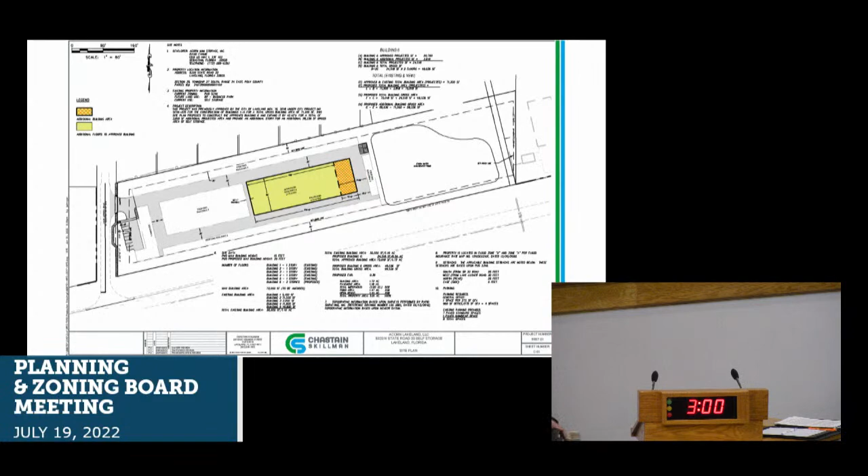There you go. Sure thing.

Good morning. For the record, my name is Shelton Rice, an attorney with the law firm of Peterson & Myers, address 225 East Lemon Street, Lakeland, Florida. Today I'm here on behalf of Acorn Lakeland LLC. I have with me in attendance David Fammy and Matt Fammy of Acorn. They own a couple of self-storage facilities throughout the state, a family-owned business. They operate these facilities, and they have owned this site since December of 2017.

Thank you, Mr. Scarce, for going through that presentation. I think that gives a good sense of where we are, a little summary of what we're asking for, but I'll add a little more detail as we move forward. Just another location map to give you a sense: you have Lake Luther Road running along the western boundary of the site, Lakeland Hills Boulevard or State Road 33 running along the southern boundary. Access is from Lake Luther Road, and then Lake Deeson Road to the north of the site.

The property is approximately 5.8 acres, with a future land use designation of business park. The context district is suburban neighborhood, and the zoning is PUD, PUD 5596.

So I want to briefly go over some of the history. I think this helps color how we got to where we are, with this self-storage facility that backs up to single-family residential, and some of the thoughts that have gone along throughout time.

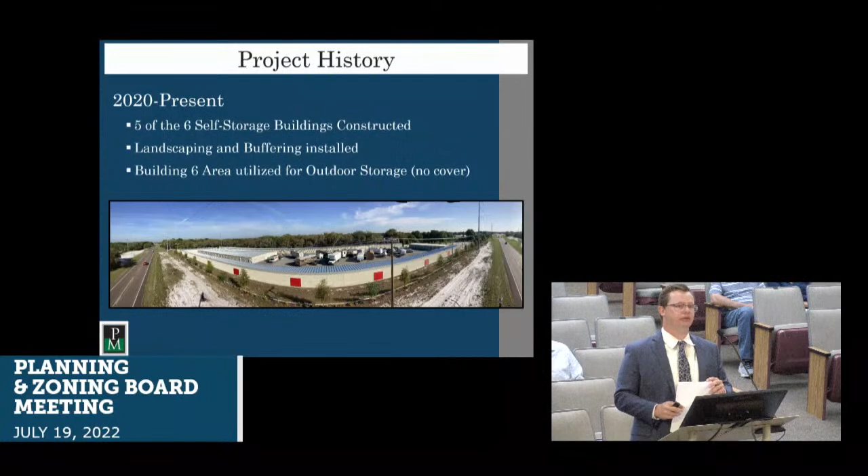What we're proposing to do is eliminate this outdoor storage area and replace it with a 2-story self-storage building that would significantly increase the amount of self-storage allowed on this site, allowing another 27,000 plus or minus square feet of self-storage to meet the growing demand that our clients have experienced.

Looking at the existing building, this shows the single-story structure, internal, with 12-foot buildings that go around the periphery of the property. This property is fully guarded, fenced, and gated around the perimeter, so the buildings serve as that perimeter buffer around the outside, with landscaping in between the existing single-story self-storage building and the outdoor storage area where the proposed new 2-story building would be located.

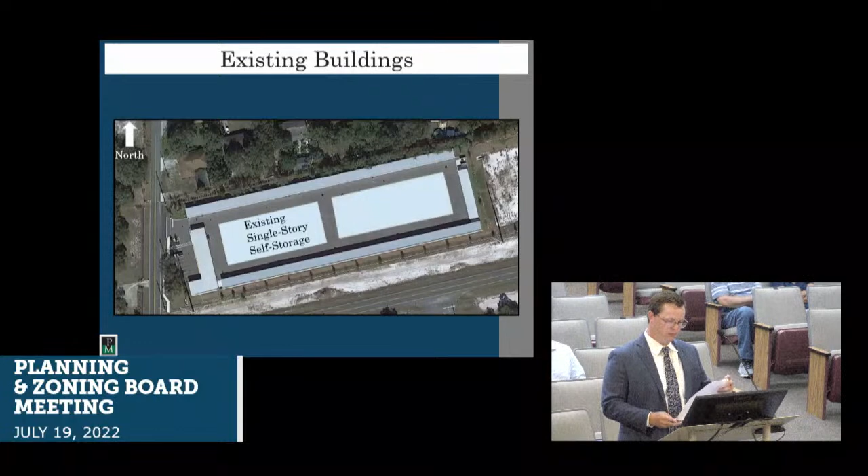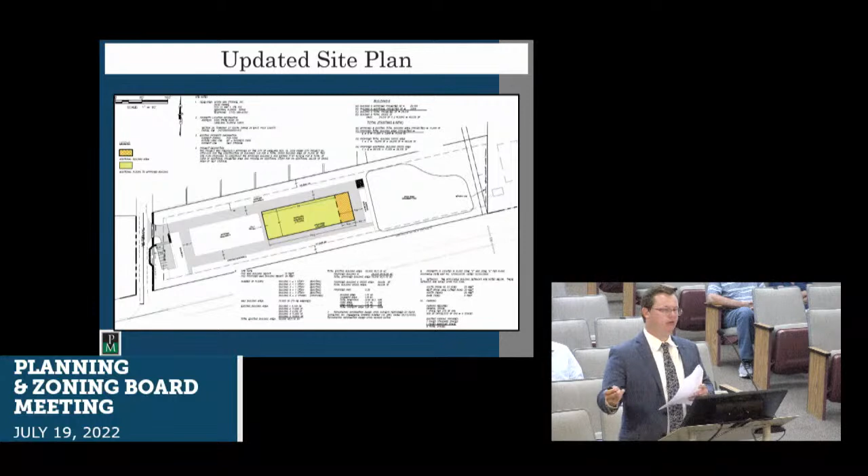This shows the proposed 2-story self-storage. This is the site plan that Mr. Scarce presented a minute ago, showing slight expansion of that building to the east. Our engineer, Chastain Skillman, has looked at making sure we can still meet all fire code requirements as far as distance and turning internally, and we can still do that by expanding this footprint a little bit eastward. The yellow building, including the orange hatched area, would be a 2-story structure.

Summarizing the PUD modifications, we have a couple of tweaks we'd like to make to the previously approved ordinance: increase the maximum building area from 72,000 square feet to 99,536 square feet, a slight expansion of the building footprint as shown, and increase the maximum building height for building 6 from 15 feet to 26 feet.

Looking at that height increase and recognizing we have residential to the north, I thought it'd be good to evaluate the existing entitlements on neighboring properties and what's allowed in the suburban neighborhood context district. That district allows, at most, a maximum building height of 35 feet for any of the zoning categories. So while the PUD previously limited self-storage to 15 feet, we're still well within what would be allowed in the suburban neighborhood context district.

The properties to the north and west are residential, in the unincorporated county. The county does not have zoning, but those areas are designated with a future land use of residential suburban, which allows a maximum building height of up to 50 feet, so there are very large single-family structures there. What we're asking for is just a portion of the maximum height we'd be allowed in the suburban neighborhood context district if it weren't for the PUD limitation.

You'd likely only be able to see a small portion of the second floor of this building, and it would be seen through the vegetative buffers that exist there today. So we think from a visual perspective it's pretty minimal impact, particularly when we provide these additional architectural standards and requirements on that northern facade.

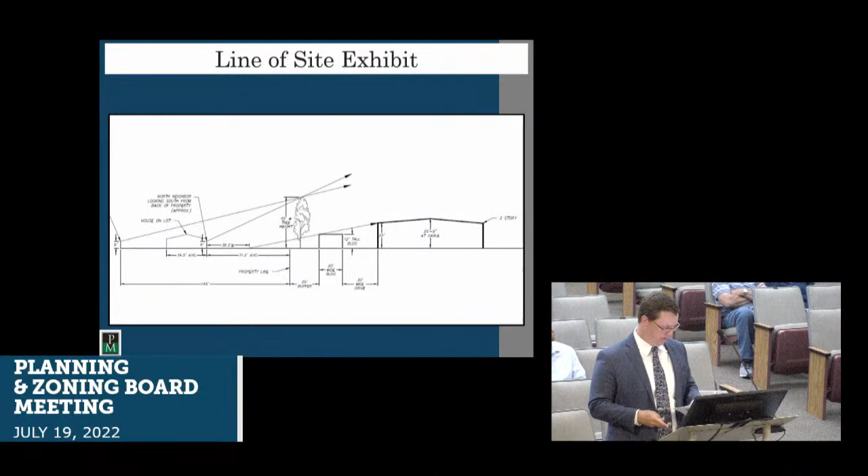Recognizing some of the history and the neighbors that have been out here, and comments and discussions we've had with city staff, we proposed to have a community meeting. We sent out notices to everybody who gets notice for this site, notifying them we were going to have a meeting on site on July 12th.

We held that meeting, and we also included phone numbers and email information so that if people couldn't attend, they could reach out to us and tell us if they have concerns, questions, or want to provide additional feedback. We've done our best to solicit feedback and get cooperation and participation from the neighbors.

At that community meeting, I believe there were maybe 9 or 10 folks from the neighborhood who came. I didn't hear any significant objections. There were a couple of questions, but none that led me to believe anybody had major opposition to this. I'd like to thank Mr. Scarce, who also attended the meeting, to get a sense of what the neighbors may have to say.

In conclusion, our request is to replace the outdoor storage area with a 2-story self-storage building. We've shown how that's on the eastern side of the site, adjacent to where we already have a structure. It's a two-story structure internal to the 12-foot perimeter, not on the property boundary. We've shown it's pretty minimal from a visual impact standpoint to the residential neighbors.

Self-storage is a pretty low impact use, and this is something that has come before the Planning and Zoning Board quite a bit lately, but these facilities don't generate a lot of trips, which makes sense practically. When you have a unit, you put your stuff in it, and it's not until you go to move that stuff out that you visit the site again. So it's not often you have a lot of people coming back over and over with significant frequency.

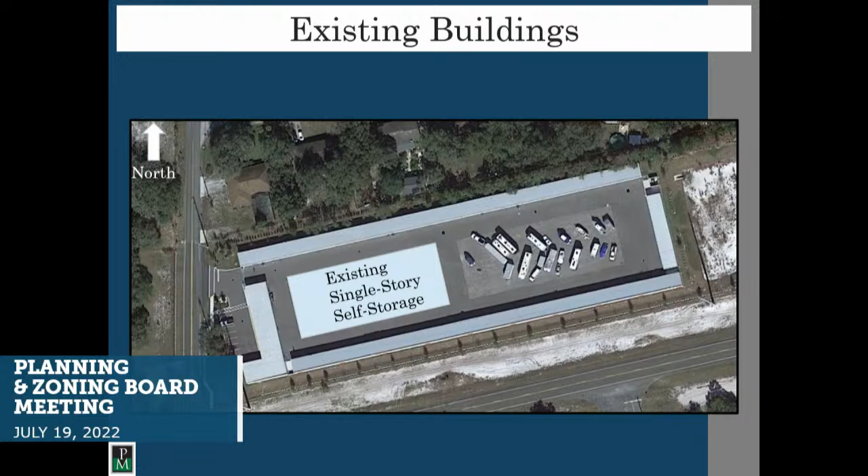Would it be on that sandy parcel right there? So this is where the two-story structure would be located. And then there's parking adjacent and along these other units, areas where these vehicles could be parked.

It's hard to see it from this perspective, but there's a lot of space. I believe Mr. Scarce may have some pictures. I don't want to ask him to pull up his presentation, but there were some pictures internal to the site showing quite a bit of spacing between some of the doors and areas for them to locate those vehicles. So you wouldn't locate them on the sandy parcel on the side over there? No, ma'am. They would all be internal.

Any other questions from the board?

I just have one question, Mr. Chair, related to the buffer along the north side of the site. It looked like in Mr. Scarce's presentation that there was an area where there was a gap where you could see the north side of the building from the adjacent homes. Is that something that would be addressed to fill in that buffer at ground level so the residents aren't looking at the back of the building? Because it looks like there may be some gaps in that vegetative buffer.

I've walked that a couple of times, and I believe Mr. Scarce has as well, and I have a lot more pictures that I didn't include in the presentation. The vegetative buffer that exists here has oak trees and pretty significant shrubbery, but it may not all go above the 12-foot building. That's a pretty high standard as you move vertically up in the space. So when you look at the options for additional landscaping that could be required where that natural vegetation exists, you'd likely have to pull some of the existing vegetation out.

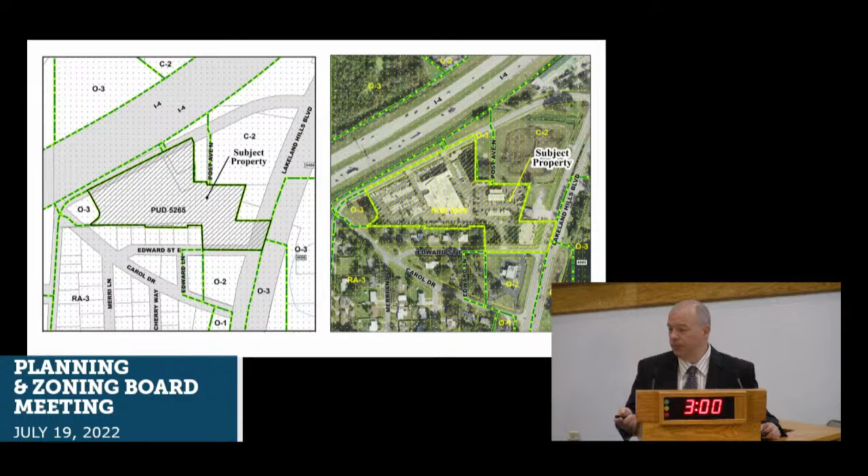Good morning, for the record, Todd Vargo with Community and Economic Development. This is a minor modification of a PUD for the Fields BMW dealership, located at 4141 North Florida Avenue, right by I-4. Here's the aerial and the base map. Sorry, I said it's the Mercedes-Benz dealership, sorry.

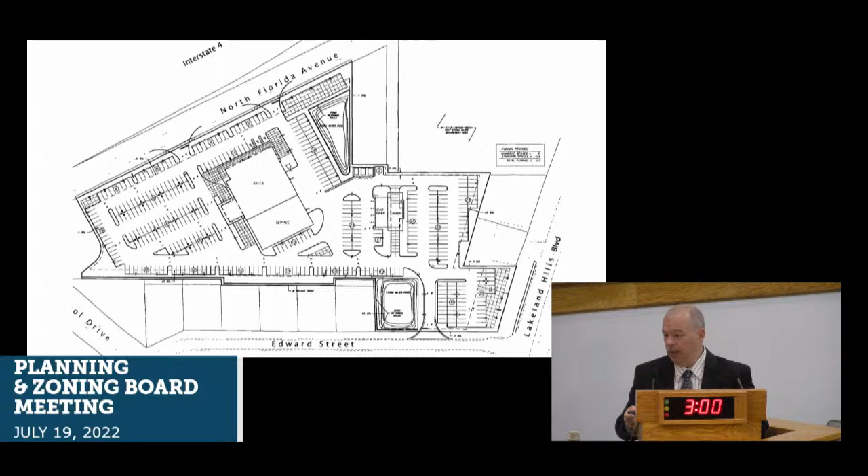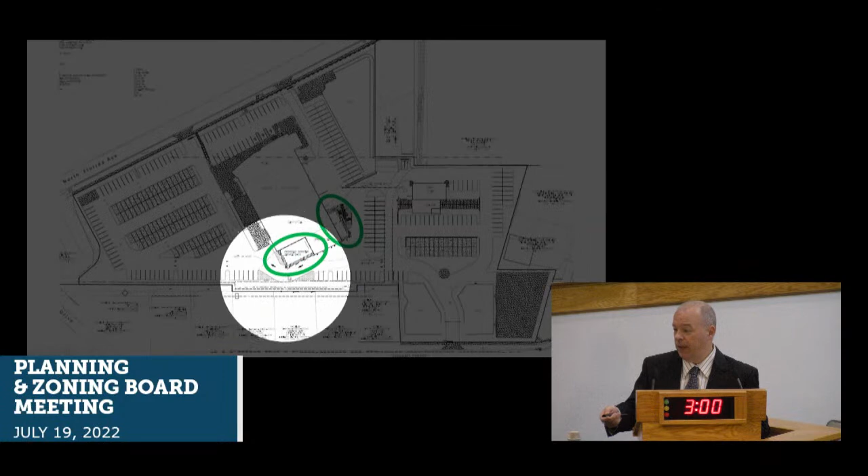So here's the existing site plan that was approved with the PUD, and here's the new site plan. I've outlined in green where the changes will be. In essence, this area over here will be one service bay and the office waiting room, and then there'll be some other service bays over here. You can see that to keep the flow of traffic, they're losing some parking spaces back here.

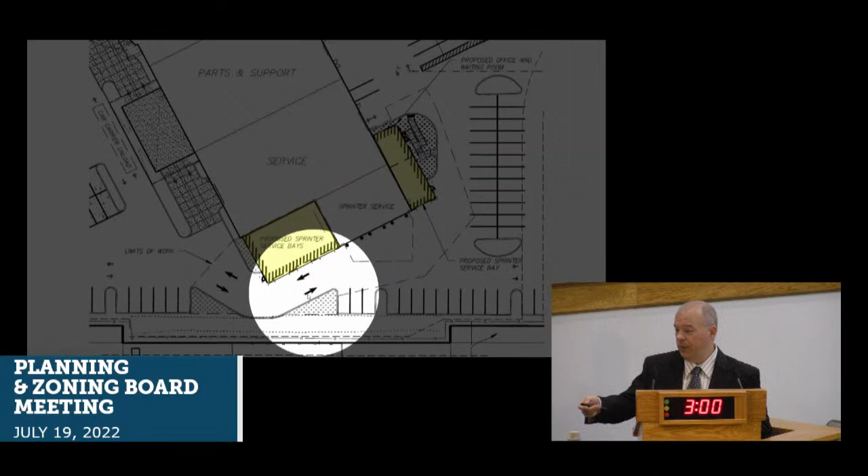Here is a close-up that I promised earlier. Again, there's an office and waiting room here, a service bay, an existing service bay as you saw in the picture, and some new service bays they'll add. They'll take some parking out here and provide for traffic flow around the building. And I think that's all that I have.

Invite the applicant up if they want to say a couple words or explain anything that I might have missed.

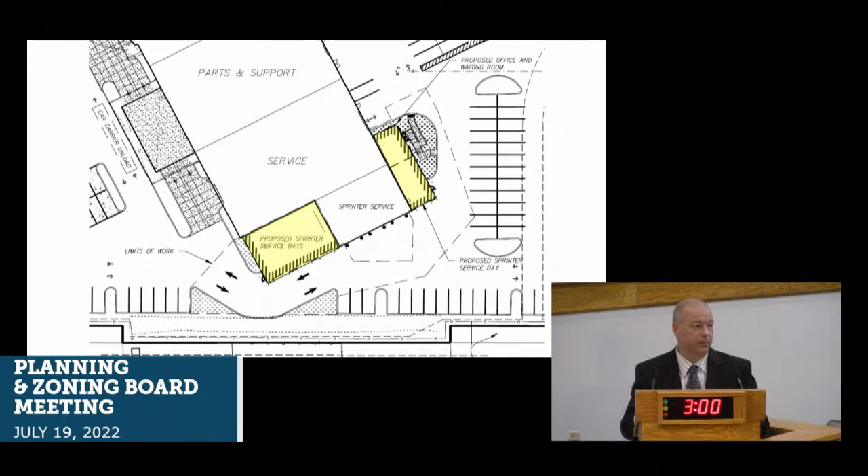Morning, I'm Drew Morrison with Chastain Skillman, and I think you've just about covered it all. There's not really too much beyond just the additions there. Beyond the change to that traffic pattern and removing some of the parking spaces, the only modifications are some adjustments to utilities, including, I think we're moving a grease trap, and the stormwater infrastructure pipes and structures are being modified a bit as well, but there's not really much beyond that.

Just for the record, can we get your address? It's 205 East Orange Avenue, Lakeland, Florida. Thank you.

All right, any questions from the board? So with approval of this minor mod, we don't have any changes to the conditions, we would just update the site plan with what I showed in my presentation. And there's no existing conditions that would be affected by these? No, sir, we scrubbed the conditions and didn't see anything that would need to be changed. Oh, and I should say, like Philip stated with the last case, I haven't received any phone calls about this case at all.

Okay, considering this is open for approval today, I'll entertain a motion. We call for public comment. If there's any public comment on this one? For the record, none. All right, entertain a motion. Motion to approve. Second? All in favor? Aye. Aye. None opposed? All right, thank you very much.

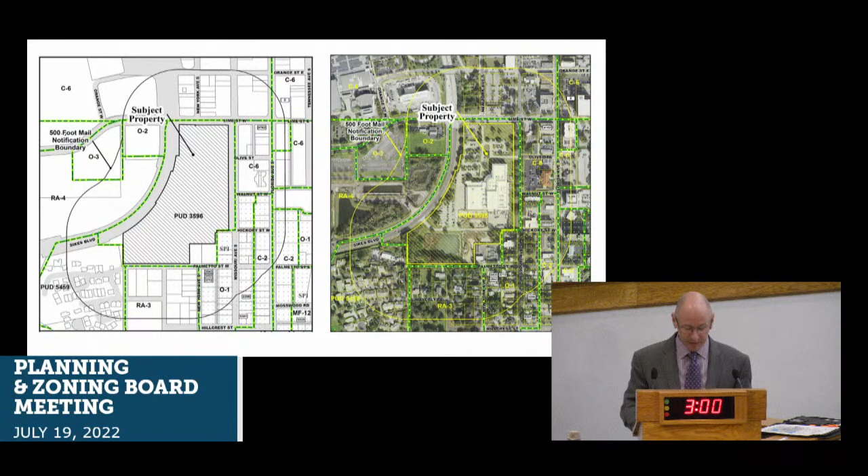With all that said, the Community Economic Development Department reviewed the request, and we do find it consistent with our comprehensive plan. It's our opinion the request, as conditioned, is consistent with the comprehensive plan. All roadway levels of service and operations are expected to be acceptable, as it's within the TCEA. The actual construction, however, will be subject to final concurrency determination and other essential services at that time.

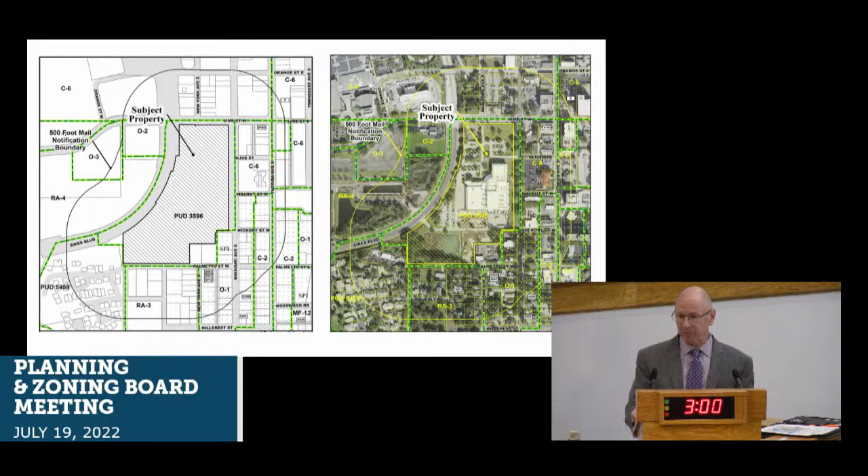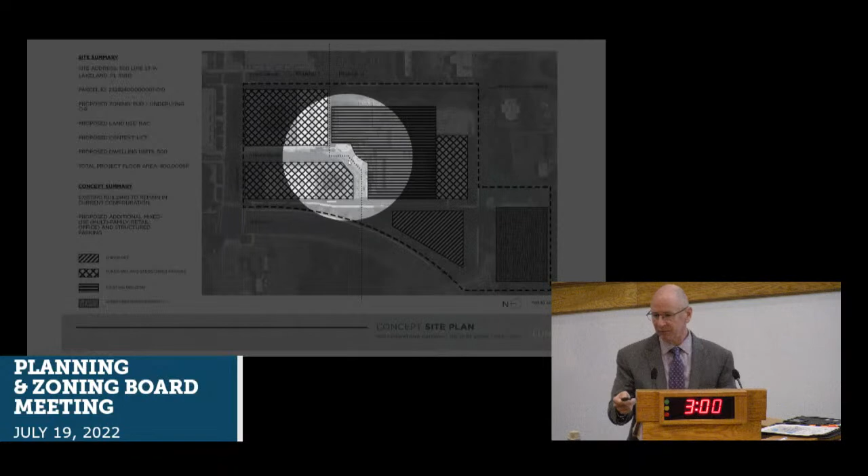So the conditions: it's recommended the request for the PUD described above and attachments A, B, and C be approved. Again, what's changed from the staff report, instead of that maximum 3 FAR, it's a maximum 0.5, maximum residential density of 175 dwelling units per acre.

Permitted uses will be all those permitted by right within the C6 zoning district, including the administrative offices for the newspaper facilities, for the newspaper production and distribution, and as a transitional use.

Upon the commencement of the redevelopment of the property for the C6 office, commercial, residential uses, the existing use of the property for newspaper production and distribution shall become legal nonconforming, subject to the termination provisions listed within our code 13.3 of the Land Development Code.

And development standards for the existing, these are fairly consistent with what we've adopted in the downtown. But the building heights, building setbacks, 100 feet from Lime Street, 50 feet proposed right-of-way from Missouri Avenue. These things are consistent with what we have in our land development code. You can see the setbacks there. Maximum building height was 75 feet.

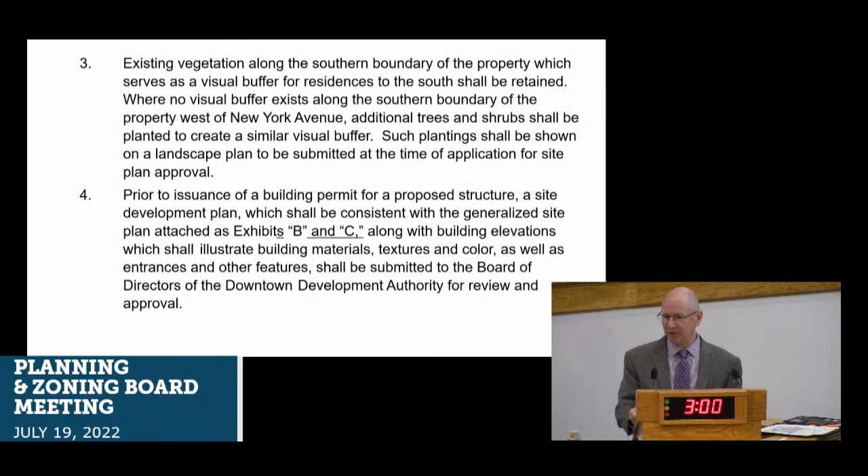Again, bicycle parking is required, and on-site covered transit stops. The rest of the conditions are fairly straightforward. I'll let the applicant come up if they have any questions or comments, but staff stands for any questions you may have, and we do recommend approval of the site plan and the PUD modification.

Good morning, Commissioners. For the record, my name is Bart Allen. I'm a land use attorney with the Peterson & Myers Law Firm, 225 East Lemon Street, Lakeland, Florida. I'm here this morning on behalf of the property owner and applicant, Lakeland West Lime LLC.

With me this morning I have Mr. Jeff Donaldson as a representative of the ownership group. I also have with us Lens Group, Stacy Witchen and Steve Boynton, who've been working on the proposed development on this site. We went through a full presentation last hearing. I'm happy to get back into that today, but given where we are and this being a second hearing, I'm going to skip over that and just thank Philip and Mr. Scares for his work on this project and all of staff.

We are in full agreement with the conditions of approval proposed to you this morning, as well as the staff report, and want to thank Philip for jumping on the phone unexpectedly last week to clear up those couple little tweaks.

At the end of the day, what we're seeing here is this PUD modification is set to allow the site to redevelop under the C6 zoning standards that surround the property and are on the adjacent properties, and that's the intent here. Even though we're doing it within the PUD, it is really looking at it going into the C6 zoning, adjacent to us in the downtown CRA, and this is, as we discussed ad nauseum last time, where you want to see the type of intense development.

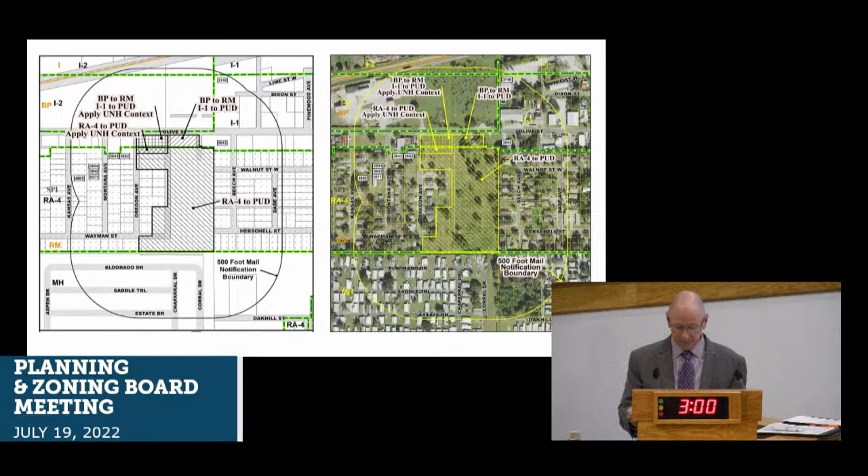The proposed multifamily development consists of 4 three-story multifamily buildings. I'll go through the site plan here. The maximum height is 40 feet.

As amenities, the site plan includes an on-site clubhouse, pool, and playground, located within the northeast portion of the site, right up here. The pool and playground area are near the Wayman Ditch, which runs along the eastern boundary of the site.

The applicant has worked with staff to reserve a portion of the site adjacent to the Wayman Ditch for a future trail connection to the West Side Community Park via Wayman Street, which will also help satisfy the development's open space criteria. A minimum 20-foot easement will be required to accommodate future extension of the Westgate Central Trail to Olive Street, connecting through the site over here to Olive. That'll be a work in progress as the site develops.

Prior to the public hearing, the applicant and a representative from Blue Sky Communities met with the Westgate Neighborhood Association to present their plan at their regular monthly meeting on June 6th, which we talked about at the last meeting. There were very positive comments regarding the proposal and the site plan.

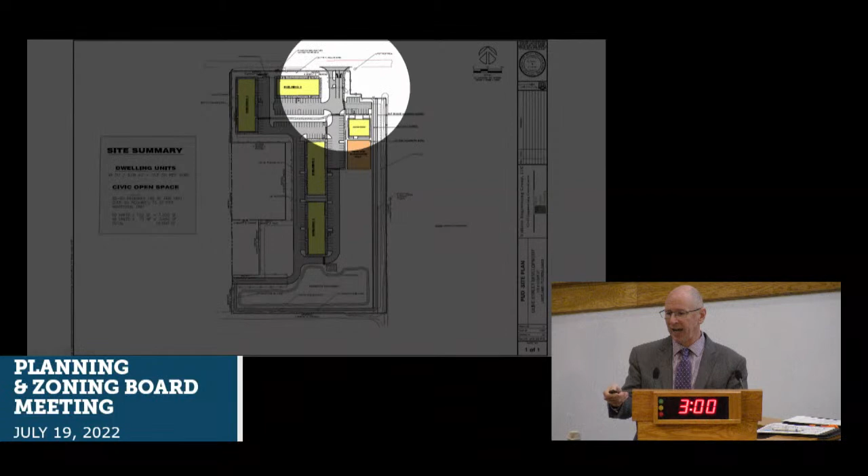So you have these residential buildings here, and the clubhouse and pool area on this site, with access primarily off of Olive, and secondary access here to Wayman as well.

And then I'm going to go over the conditions. It is recommended that the request for change from BP to RM, and rezoning from I1 and RA4 to a PUD, and application of the UNH context subdistrict be approved as described in attachments A, B, and C, based on your staff memo. The permitted uses would be multifamily, 96 dwelling units. The site development plan shall be developed in accordance with the site development plan shown in attachment C.

Minor modifications may be made at the time of approval, contingent upon the Director of Community Development, and the modified site plan shall be approved contingent upon the vacation of existing right-of-way and easements located on the site, and the relocation of any utilities and drainage facilities within those rights-of-way and easements, and dedication of new easements as those facilities are moved around on site. So that just covers us as we move forward.

Generally, in normal development we would have these easements vacated prior to development, but there are so many moving parts to this that we're just there as their engineer works with staff and public works. As those lines change, they will dedicate the easements as development occurs on the site.

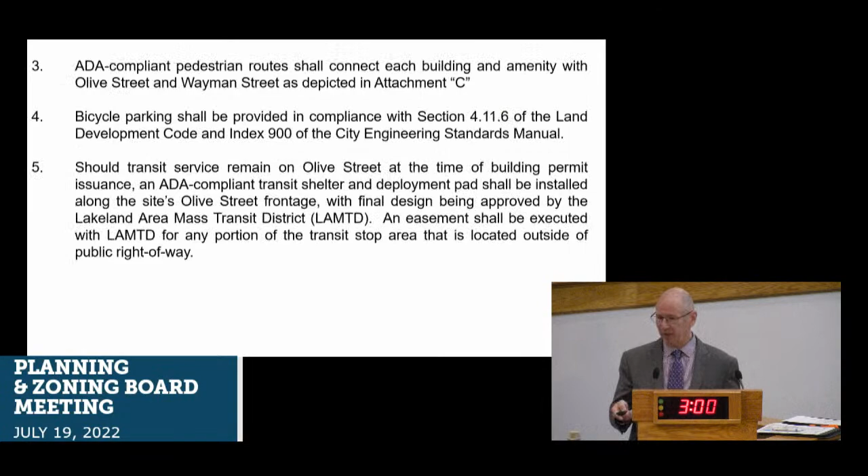And with that, I will let the applicant come up and speak, and we can talk about the site plan if you have any questions as we move forward. But we do recommend approval of this site plan as well as the conditions as proposed.

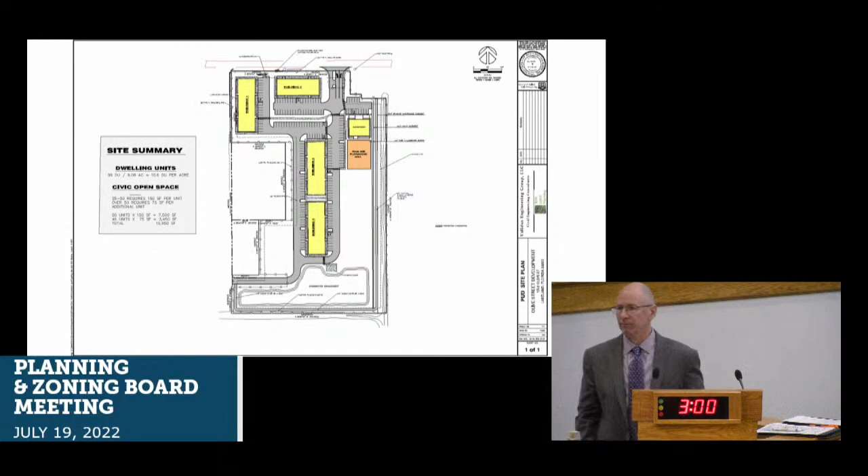And Mr. Scares, just to clarify too, that we did provide a markup of some additional sidewalk connections, yes, just to mirror the conditions and the verbiage. And so that would be something that would be provided, subject to approval, to the City Commission.

Yeah, that will go along with the next iteration of the site plan when we move forward to the City Commission. But in a sense, you basically have this. There are some key details regarding the transit stop and access from this sidewalk over to this sidewalk, some other key features there.

Good morning, members of the board. Tom Woodridge with CDW Land Planning here, representing the project in front of you, along with my team present in the audience, to ask for your consideration and approval of our 96-unit affordable housing project.

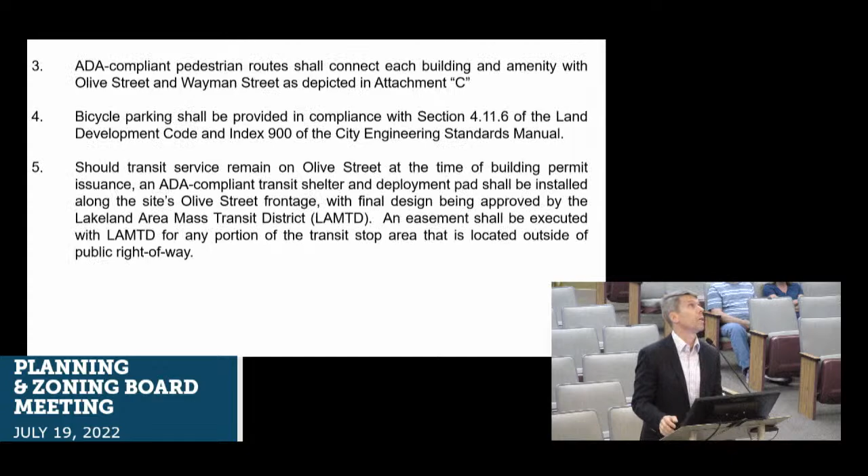Our position remains the same, to be supportive of this multi-use trail. We're just having challenges determining how we're going to make that work, even to the point that it would be a challenge for us to reconfigure this.

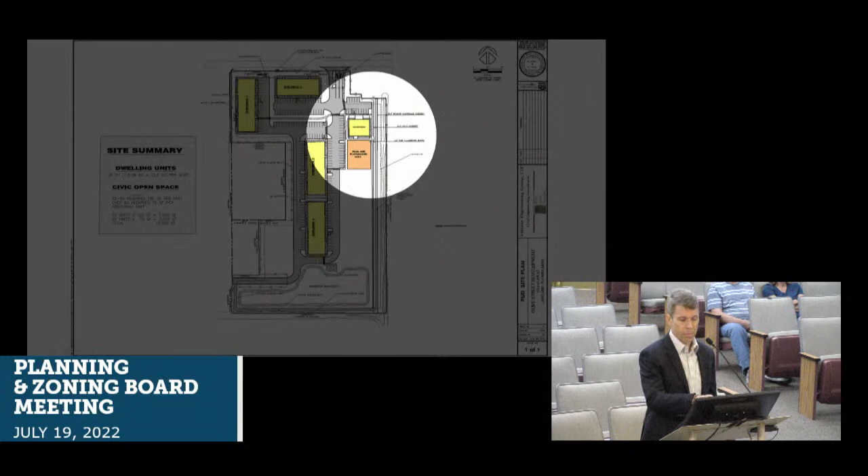The gray is the multi-use trail, and as it heads north to bend to the west through that area, you can see there's a stair step. Bending it through where we'll be having landscaping, other utilities, and things of that nature between our entrance drive and the property line to the east is something we're not comfortable accommodating exactly like that. But we'd like to leave the condition stating we'll coordinate with staff to put the multi-use trail in place, which is here. Then, using the minor modification criteria from another section of the conditions - letter C, I believe - we'd try to find a solution. But the specifics of bending through there is something we're just not comfortable with.

We've tried, and we will accommodate in every way we can, and we're supportive of it. But we'd ask the board to strike that second sentence and just let us work through it, since the first sentence essentially says to provide the trail. Just let us figure out how we can get that done and give us the design flexibility to make it happen. I think that's really the main point of discussion this morning from us. I'd love to entertain any questions you have.

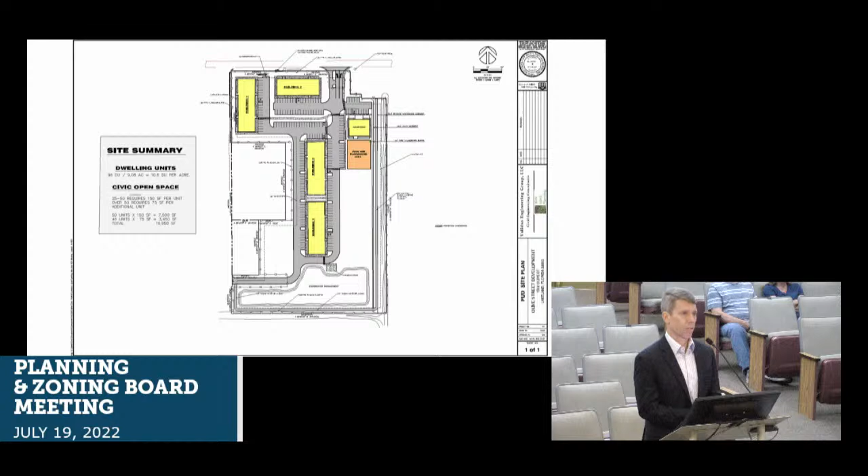Just to clarify the language - the reason we wrote it so the easement would wrap around is we definitely recognize there's no way to get the trail through as a full 12-foot wide multi-use trail. So the intent would be that we'd end up with something worked out at the time of site plan submittal that would utilize the sidewalks internal, adjacent to the parking lot, and then work up to Olive Street, just to serve as an interim connection until we're able to get the full trail extended up to Olive Street in the future.

So in terms of what Mr. Woodrich is discussing, that's exactly the intent of the language as written - that we would have an interim connection to connect to the trail from Olive Street, very similar to what we have at the south end of New Jersey Road in the Three Parks Trail, where you work through the apartment complex to connect two portions of the trail. Definitely not our intent to try to thread the needle with a 12-foot wide asphalt path, but to work with the connectivity already built into the layout to make that happen on an interim basis.

And would that access help, because in one of the previous paragraphs it sounded like the Citrus connection or the bus service was going to be relocated?

Yes, and that's definitely a big concern, and I know last week at the Citrus Connections, the Lakeland Area Mass Transit District Board meeting, that issue did come up with some of the residents in the neighborhood. The way they left it with the LAMTD board is that for the next year, this complex will not be operational within the next year, likely because of construction timelines and site plan review and approval.

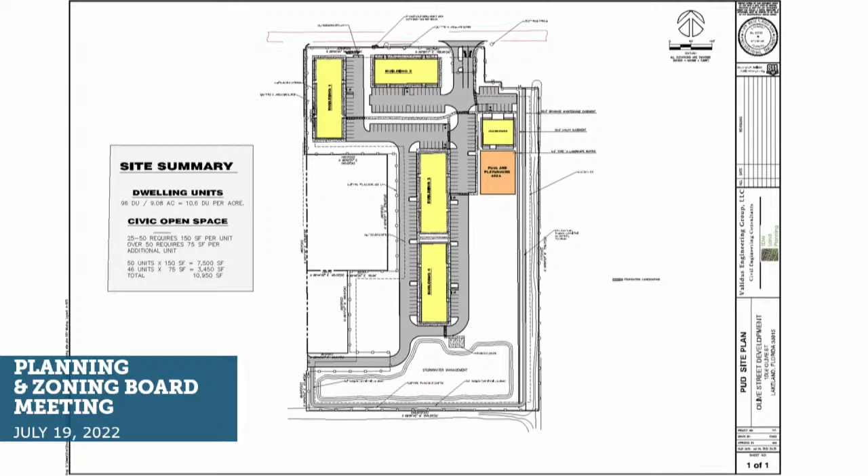And so between that and perhaps at engineering level, if it had to shift either way, it's really a pinch to know if we can fit that trail right of way and everything that we've got going on there at the entrance in that narrow sliver of white that you see between the turn arrow exit for the site and the eastern property boundary. So we're just kind of concerned that language would hold us up and we wouldn't be able to meet that condition if that was the desire or intent, that's where the connection has to occur.

If that makes sense. Philip, if we can go back to that condition, I think I may have maybe offer some language that may help us here.

Okay, thanks. So perhaps the second sentence could say, the easement shall be generally routed through the clubhouse area via the proposed sidewalk connections, the proposed internal sidewalk connections in front of the clubhouse and along the site driveway to provide a connection between Olive Street and the site driveway.

I'm really confused about this. Are you saying that you're going to route this public trail through the development itself? It would be using the sidewalks at the north end of the site. Is this a gated site? Yes, and that's part of the issue as well. This is a public multi-use trail, and we're concerned the way that it's, even if it wasn't into our site, the way the condition, if we had to push things around, it really is disruptive from a design perspective, and we don't have all that design configuration completed yet to know if it's even going to work.

Okay. But to your point, if it goes in, it's definitely a... What is just to the east of the development? Because we don't have the picture on our computer that you've got. To the east of the gray line, could you put the site plan up again, please, Philip? To the east of the site is a ditch, and then there's...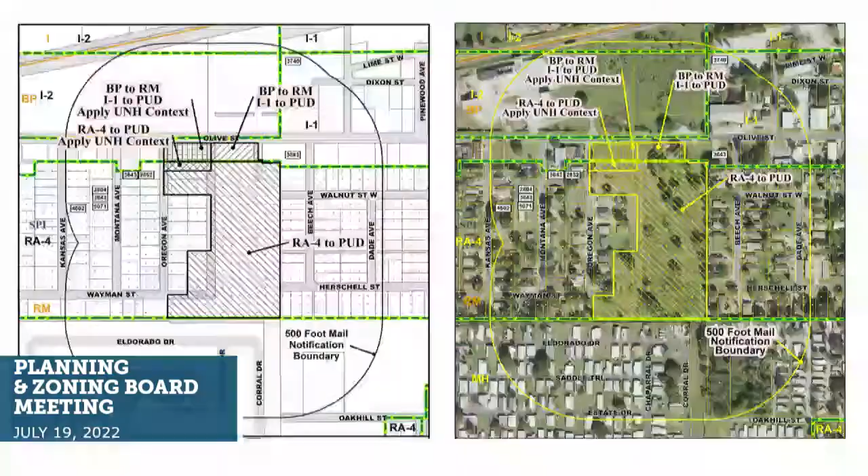Absolutely, I'd call that minor, and certainly in the spirit of keeping that connection alive to Olive Street. So my question would be, would you be opposed to maintaining the language that's in there with the addition of 'changes to this condition may be approved at the administrative level'? Yes, as long as it's understood, if for some reason we can't accommodate that trail connection—we hope to—but if we can't, it doesn't kill the project at the administrative level.

And correct me if I'm wrong, Chuck, but it sounds like even if it's connected with a sidewalk, it doesn't have to be the full 20-foot easement with the 12-foot trail. If it's just a sidewalk that edges around to connect up—exactly. The sidewalk would suffice. The intent is just having some type of connection there. So yeah, we definitely recognize there are some constraints as you get further.

I think that's fine, and I think that would be almost like a temporary solution, Chuck, wouldn't it? Because the ultimate would be to have the full 20-foot trail. So if we dead end it like it is there to the gray, and then just put a sidewalk as that temporary connection until, say, five years from now someone says we're ready to put that final last 100 feet in—great. That's the ultimate goal, but for now the temporary solution is that connection point. I think we can work through that.

Okay, thank you. And that's really all we had, unless you have any questions of us at all about the project. Any questions from the board?

I'll entertain a motion.

I make the motion, what you said. Yeah, I'm like, how do we word this, how do we do... Philip, can we go back to the condition real quick? Yeah, yeah, I think it would be helpful to.

Generally is a pretty key word in that second sentence. Yes, I was thinking as well. Easement shall generally be routed through the premises to provide a connection to Olive Street. So my original recommendation was maintaining the language, just adding 'changes to this condition may be approved at the administrative level.' Yeah, oh, there you go. Yep, yep, okay. All right, so just to restate the motion.

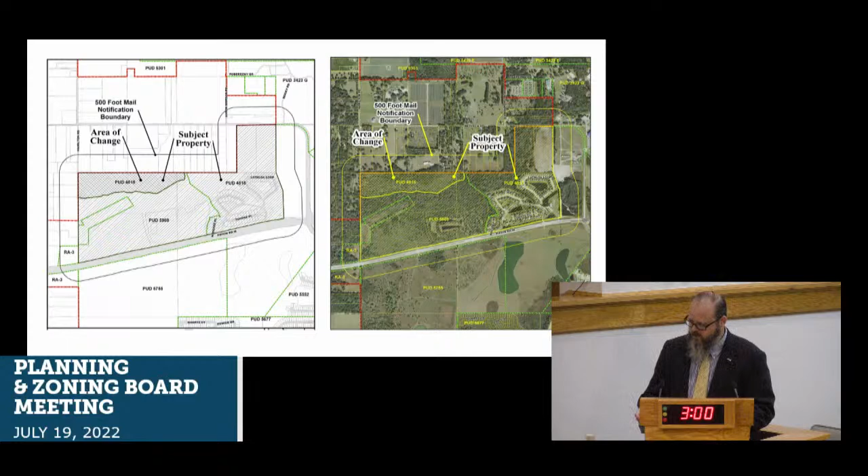As you recall, this is a substantial deviation from what was originally proposed with 49 lots. The residential low future land use designation allows densities up to 5 dwelling units per acre; this is far less than that. As submitted by the applicant, the revised application will be developed at a density of 0.14 dwelling units per acre, well below what's allowed for this future land use designation under the city's comprehensive plan.

To accommodate this level of density, the minimum lot size will be 4.83 acres, approximately 210,395 square feet. This is significantly larger than the 5 to 10,000 square foot lots you see throughout the existing developed phases within Morgan Creek.

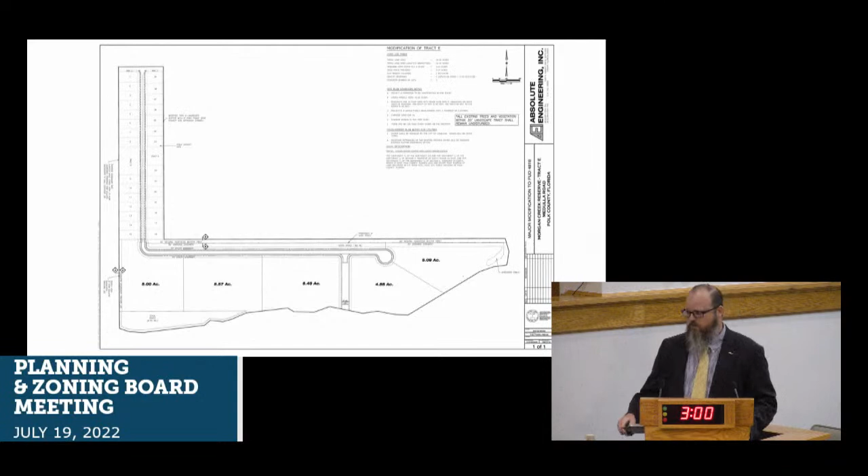Overall, staff has determined that the proposal before you today is consistent with the city's land development regulations as well as the city's comprehensive plan, and we recommend approval with the following conditions: Tract E will be identified as 5 dwelling units, and the lots in Tract E shall have a minimum lot area of 210,395 square feet.

In accordance with RA1 suburban neighborhood subdistrict standards, the development standards will be as follows. The minimum front setback required would be 30 feet, the interior side setback would be 15 feet, the minimum rear setback would be 40 feet, and the maximum lot coverage would be 10%.

The site development plan would be developed consistent with what you see before you today. And Tract E will also provide 3.51 acres of open space.

We have modified the utilities condition to read that it is anticipated that the project will require improvements to offsite water and sanitary sewer lines and/or lift stations to meet concurrency. However, it is also anticipated that Tract E will not be required to connect to the city's sanitary sewer system due to the lot count and proximity to existing city sewer service.

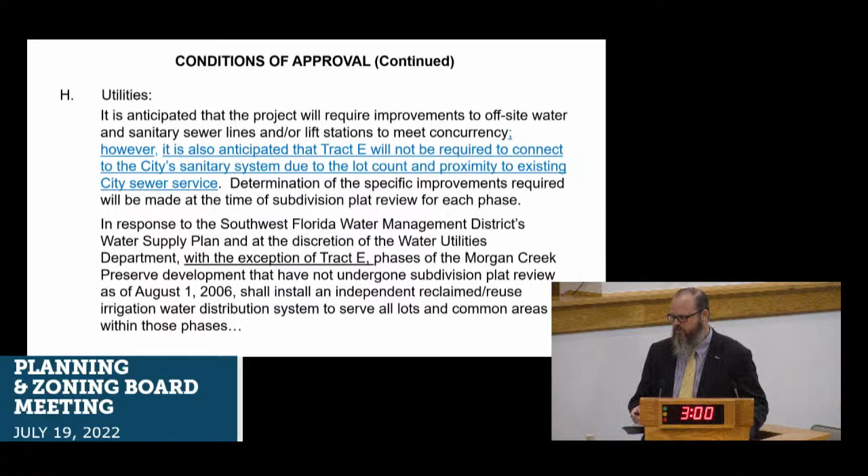In addition, in response to the Southwest Florida Water Management District's water supply plan and at the discretion of the Water Utilities Department, with the exception of Tract E, phases of the Morgan Creek Preserve development that have not undergone subdivision plat review as of August 1st, 2006 shall install an independent reclaimed reuse irrigation water distribution system to serve all the lots and common areas within those phases.

Under vehicle access, the project shall be limited to 2 vehicle access points on West Pipkin as illustrated in attachment C, with 1 access point on Medulla Road serving Tract F, and another access point on Medulla Road serving Tract E.

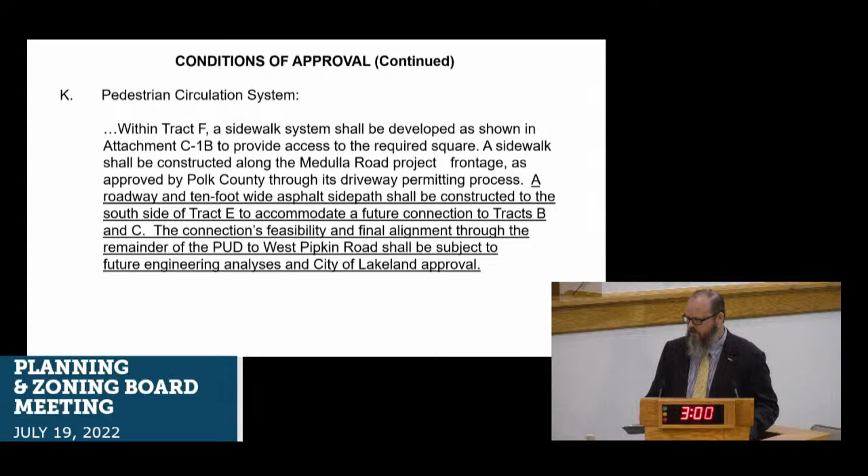As it relates to the pedestrian circulation system, we've added language regarding a roadway and 10-foot wide asphalt side path shall be constructed to the south side of Tract E to accommodate a future connection to Tracts B and C. The connection's feasibility and final alignment through the remainder of the PUD to West Pipkin Road shall be subject to future engineering analysis and City of Lakeland approval.

As it relates to road improvements, prior to the first building permit in Tract E, a new roadway shall be completed to Medulla Road that is constructed to Polk County standards. The intersection at Medulla Road shall be constructed in compliance with the Polk County Land Development Code or otherwise permitted by Polk County. The street within Tract E shall be constructed to City of Lakeland local street standards and shall be conveyed to the city only if requested by the City Public Works Department.

A stub out should be constructed to the south side of Tract E to accommodate a future connection to Tracts B and C. No creek crossing to Tracts B and C shall be open to vehicular traffic until Hamilton Road, north of Medulla Road, is improved to acceptable collector road standard and is aligned with the local street serving Tract E at the Medulla Road intersection.

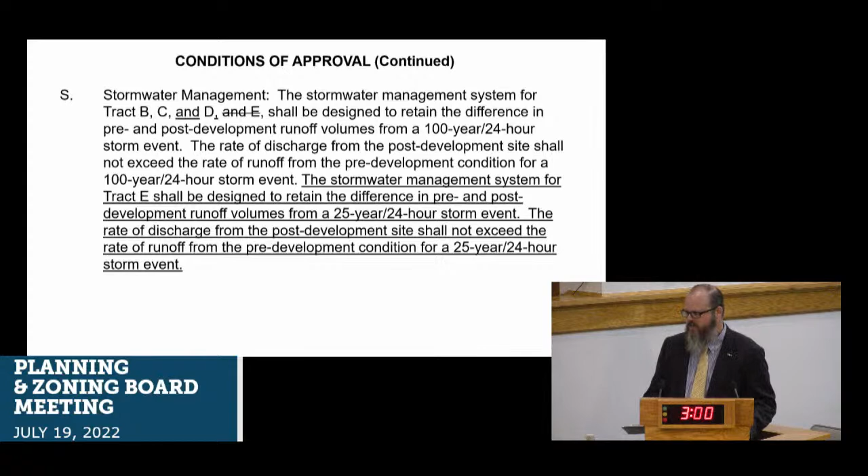Under Stormwater Management, the stormwater management system for Tract E shall be designed to retain the difference in pre- and post-development runoff volumes from a 25-year, 24-hour storm event. The rate of discharge from the post-development site shall not exceed the rate of runoff from the pre-development condition for a 25-year, 24-hour storm event.

Under buffering, and it's important to note, because I think this is very relevant as it relates to some of the concerns that neighbors have had in previous presentations or public hearings: for Tract E, a natural vegetative buffer with a minimum width of 30 feet and a 6-foot high PVC fence shall be established adjacent to the north of the project's boundaries. Similarly, a natural vegetative buffer with a minimum width of 20 feet and a 6-foot high PVC fence shall also be established on the west perimeter of the project's boundaries.

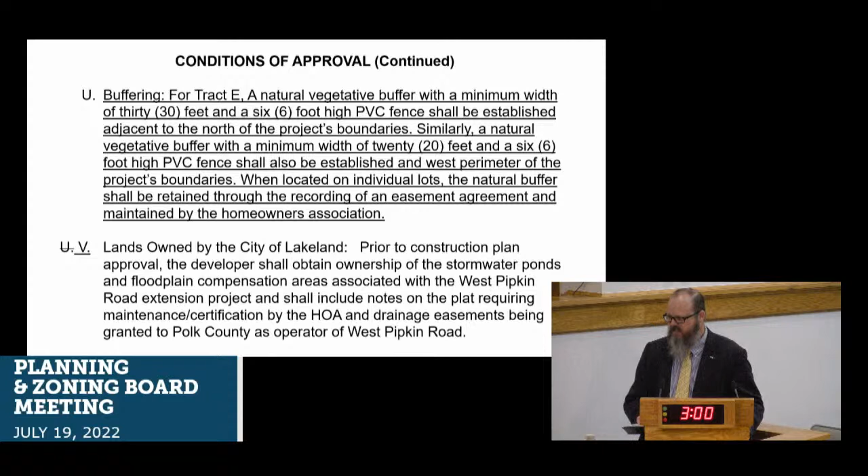When located on individual lots, the natural buffer shall be retained through the recording of an easement agreement and maintained by the homeowners association.

Lastly, special tree preservation provisions applicable to Tract E: the developer of Tract E shall only remove those trees listed as qualified in the Land Development Code necessary for construction of the infrastructure, roadway, curb and gutter, stormwater pond, and piping. The builders shall retain as many qualified trees as is feasible to allow lot development and to maintain rear lot buffers between adjoining properties and along the floodplain areas.

So again, just to recap, nothing has changed as it relates to the site development plan before you today and the proposed modifications to this PUD that we've had several public hearings to discuss. As you directed, we did discuss it with county staff. We've addressed the concerns as it relates to septic tanks, both in the suburban plan development directly to the north, as well as what's being proposed within this development. It doesn't change anything that they will be utilizing septic tanks. That was recognized both in our staff report as well as the county staff report. There aren't any issues with density, and as it relates to the city's comprehensive plan and land development regulations, this request before you today is consistent with both. And with that, I'll stand for any questions you may have.

I'll just add to that as well. I did contact the attorneys working on the litigation challenging the county's approval. It was dismissed. We pulled the notice of voluntary dismissal filed in that suit, and that was a stipulated dismissal, meaning both parties agreed to dismiss and assume the costs of their own attorneys, probably to avoid the risk of having to pay the other side's attorney fees if they lost. I spoke with the attorneys involved, and they all confirmed that litigation is concluded and that the county's decision is final and not subject to legal challenge at this point. That means county approval is a vested right of the property owner at this point in time.